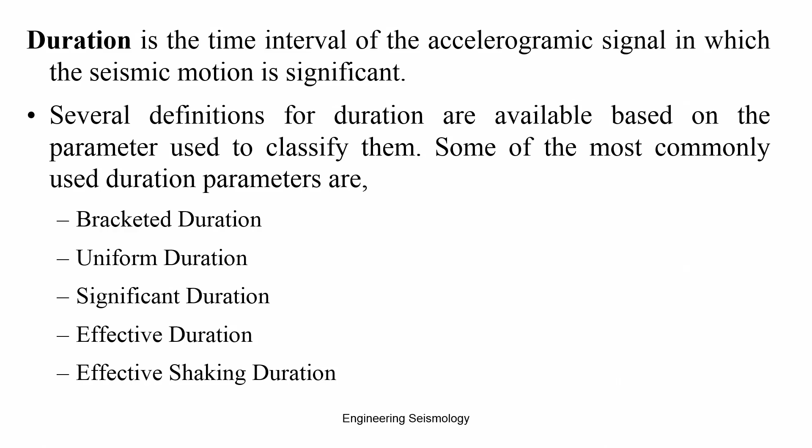So, what is meant by the bracketed duration? Bracketed duration is the total time elapsed between the first and last exceedance of a specific level of acceleration. Generally the threshold acceleration value is taken as 0.05 g. If you plot the acceleration time history of the particular ground motion, even if you record velocity and convert it to acceleration by differentiation, you have to identify the first exceedance of 0.05 g, which may be positive or negative.

So, you can draw lines at 0.05 and minus 0.05 like this. Then you can see which is the first signal crossing. That point you can consider as the starting point of the bracketed duration. Then you can see where it ends, basically at this place. This will be considered the end point of the bracketed duration. So, the bracketed duration is basically this minus this. That is called the bracketed duration.

The bracketed duration is the interval between the 2 points in time where the acceleration amplitude first and last exceeds the prescribed level. It was suggested by Bolt in 1969. Later Ambraseys and Sarma said that instead of 0.05 one should go for 0.03. That means you can define the bracketed duration for 0.05 as well as 0.03, and depending on that your duration changes. This is called the bracketed duration.

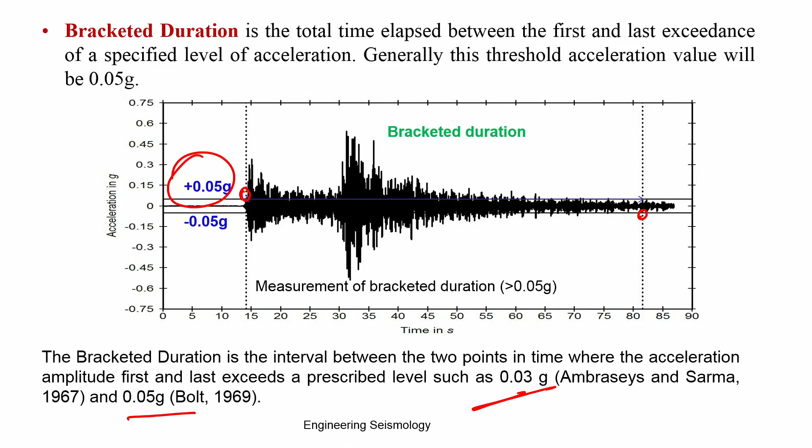So, the next one is the uniform duration. The sum of the time intervals during which the acceleration is greater than the threshold level is called the uniform duration. The threshold value is left to the user; you can define whatever threshold value. Basically, you plot the absolute values of the acceleration time history and only consider the intervals for which the ground acceleration is above the threshold value.

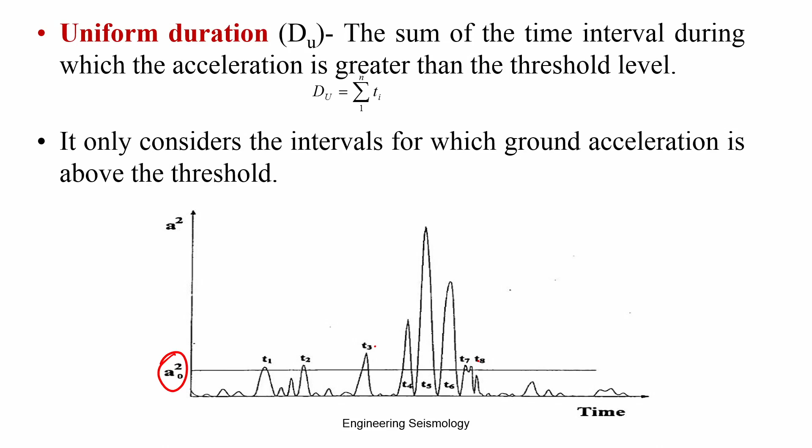For example, you define this as the threshold value, then the times T1, T2, T3, T4, T5 wherever it exceeds. The summation of these is the uniform duration of the ground motion. So, this is the summation of the time intervals exceeding the threshold value, and this threshold value you can define as per your choice.

So, before going to other durations, we will try to understand the Arias intensity. The Arias intensity IA is a measure of the strength of the ground motion. It determines the intensity of shaking by measuring the acceleration of transient seismic waves. Even though the term intensity comes, it was invented by the scientist Arias and is not similar to the modified Mercalli intensity or other intensity scales you use. It shows the strength of the ground motion and is determined from the recorded acceleration data.

So, it is a measure of the strength of ground motion. The larger the Arias intensity, the stronger the earthquake. It has been found to be a fairly reliable parameter to describe earthquake shaking necessary to trigger landslides. It was proposed by the Chilean engineer Arturo Arias in 1970. It is defined as the time integral of the square of the ground acceleration. Arias intensity could alternatively be defined as the sum of all the squared acceleration values from the seismic strong motion record.

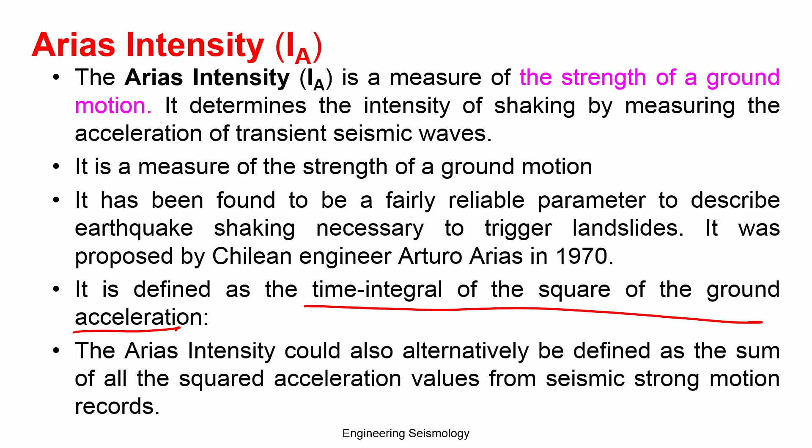So, you can see that the Arias intensity is equal to basically the time integral of the square of the ground acceleration given by this one. So, this is the Arias intensity, the square integral from 0 to Td. A(t) is acceleration in meter per second square, t is time in seconds, g is the acceleration due to gravity, Td is the duration of the signal above the threshold value.

So, you can define a threshold value. For example, generally for structural requirements they take 0.01 g as a threshold value. Theoretically the integral should be infinite. So, the Husid plot is the time history of the normalized Arias intensity. The Arias intensity expressed as a percentage of the total Arias intensity and represented as a normalized variable is called a Husid plot.

So, the Husid plot is basically: you estimate Arias intensity, you normalize with the maximum value, then you get another plot. That plot is called a Husid plot. This is the typical Husid plot of the earthquake, where you can see where it starts and ends, you have the different percentages. So, this data is further used for estimating the duration. That duration is called the significant duration.

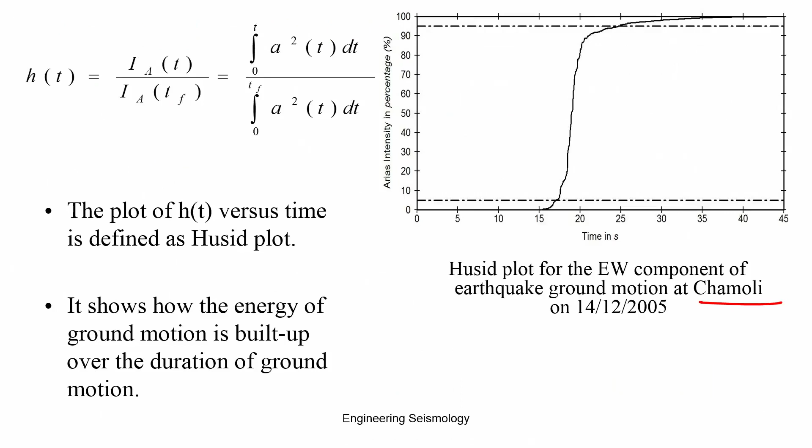So, if you take the Husid plot, you can see what is the 5%, 10%, 20% like this. You draw a horizontal line on 5%, a horizontal line on 95%, then you can define a significant duration for that particular period. So, the significant duration for 5 to 95% is that value. Similarly, if you want to define 5 to 75%, then you can draw a line. So, this duration is called the significant duration 5 to 75% Arias intensity Husid plot.

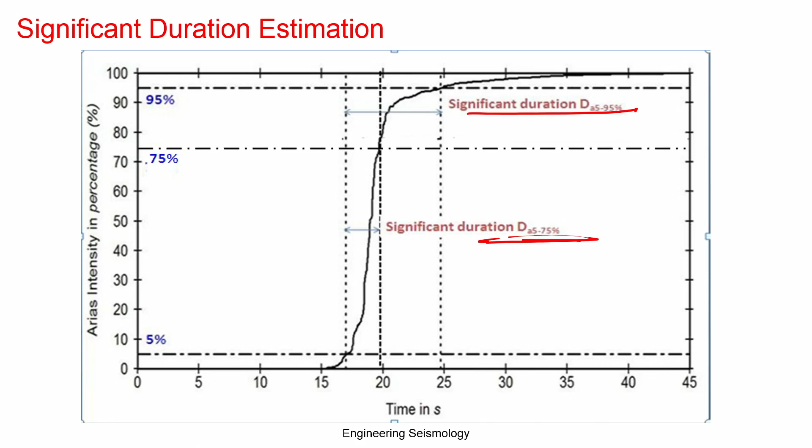So, the next one is called the effective duration. The effective duration is a function of the time interval between T0 and Tf, which mark the beginning and end of the strong shaking phase defined by absolute criteria. So, you define your absolute criteria in the form of Arias intensity, then the time between T0 and Tf, that period is called the effective duration.

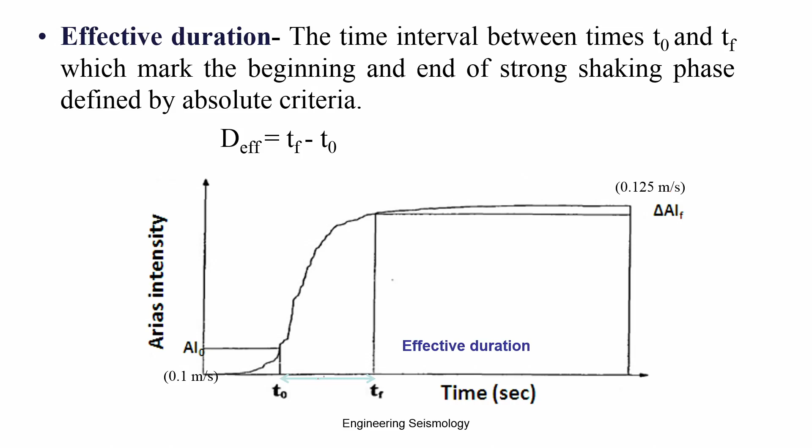So, generally for the Arias intensity they take 0.1 meter per second. Okay. Then this is the value where it is 0.125 meter per second. So, you can see this period is the effective duration. The effective shaking duration is the time interval between the first and last amplitude, considering the value of 0.01 g.

Then the accumulated energy of the three components defines the effective shaking duration, ESD, for the time window which has 5 to 95% of the total energy within the amplitude threshold. This definition considers the major energy part above amplitude 0.01 g. So, this effective shaking duration has been recently defined based on the Japan earthquake data, where they saw that significant and effective duration give different values, and again you are getting another value called the effective duration.

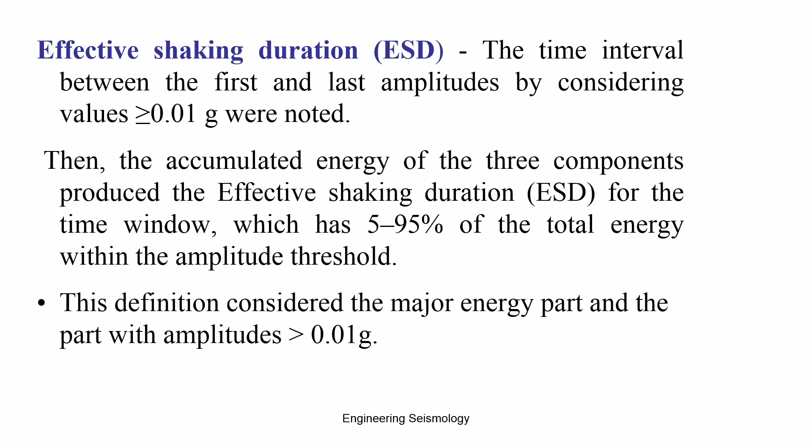So, then they come up with the definition of this effective shaking duration, which is more than the 5 to 95% significant duration, but it is less than the total duration. So, the damage is caused more in this portion. So, this effective shaking duration needs to be considered in the design. That is the new definition given for duration estimation.

So, we have discussed the 5 types of duration. This duration is basically important to describe, first, how much time it takes the structure to fail. Second, how much energy the signal carries. Third, how the seismic wave generated at a source reaches your site. So, all this information is included in the duration estimation.

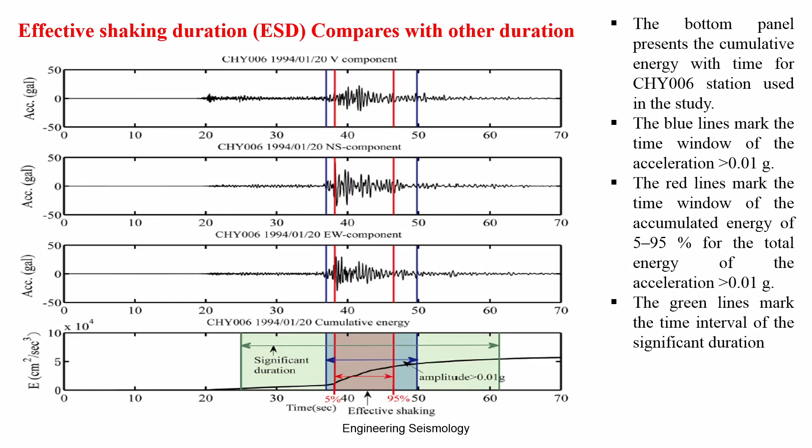Okay. So, this duration can basically be found as a total duration. The total duration is Ts plus Tp. Ts is denoted as the source duration. The second term, Tp, denotes the path duration. The source duration is given as the inverse of the corner frequency. For equal acceleration, greater durations are generally damaging. So, for equal energy, shorter duration presents a greater hazard.

So, these total durations are generally used for simulation of ground motion. If you want to synthetically simulate the earthquake signal for an earthquake which does not have recorded data, you need to know the total duration, source duration, and path duration. There are studies on how the source duration and path duration vary at one place, apart from the durations we discussed so far.

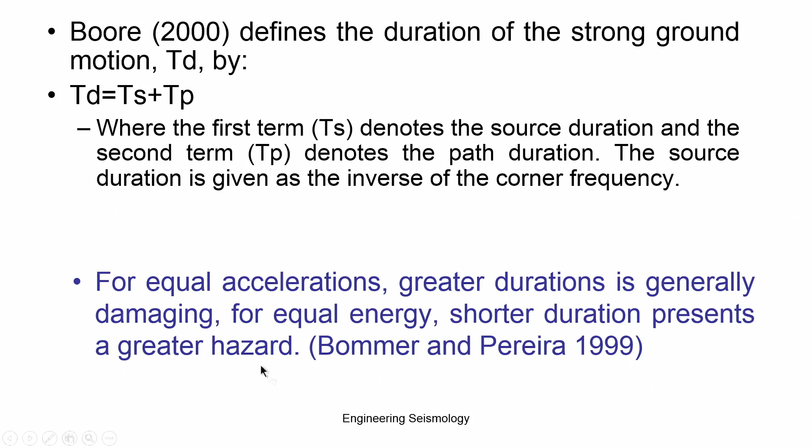So, this duration basically gives an idea of how much energy is carried by the earthquake waves, how it is dissipated, and how strong it is in the structural system. So, a longer duration earthquake causes more damage than a shorter duration earthquake with the same amplitude. Okay. So, these 4 durations are there. As we discussed for intensity, these durations also need to be estimated, and there are duration prediction model equations.

Okay. So, as you know, this duration is controlled by a particular location. For example, this is the ground. An earthquake occurs somewhere. The waves reach like this, then you have several layers. So, it reaches this place, and then it goes to the station where it is recorded. So, I can make this as a horizontal plot so that it is easy to understand.

So, this is the ground. This is the rupture point. Then the waves are generated. These waves travel like this, then you will have different material. Then these waves go through this layer. So, you will have a station here which records the earthquake. This is below the ground level, and it reaches the ground level.

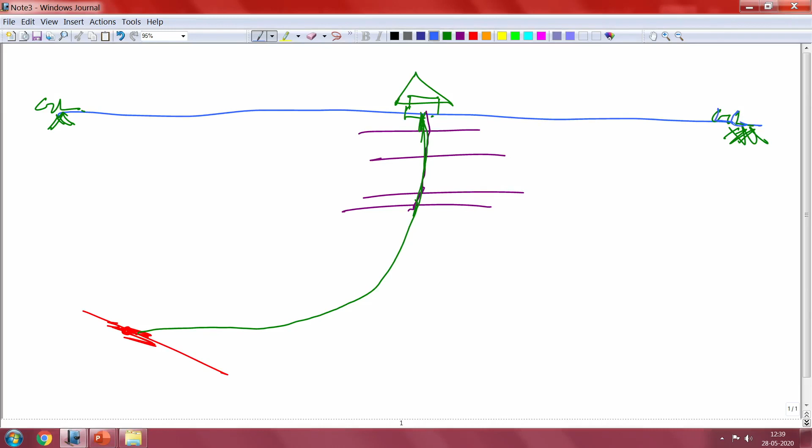So, this is the source, this is the path, this is the site. So, the wave starts from here and goes here, and this data is what you see recorded like this.

Like this, you are seeing this. So, this will be the acceleration or velocity and this will be the time. So, we have noticed that the durations are defined as a function of your acceleration values or the square of acceleration. Acceleration means you can take 0.3 g or 0.05 g where it crosses.

Or you can take the Husid plot, where you will integrate acceleration square and it gives 5% to 95% energy, or sometimes the uniform duration, where 0.1 g or 0.01 g is taken into account. You can see that these waves, when starting from this place, travel like this and reach. So, this is generally roughly about 10 kilometers from the site. The depth is 10 kilometers. So, this depends upon the station.

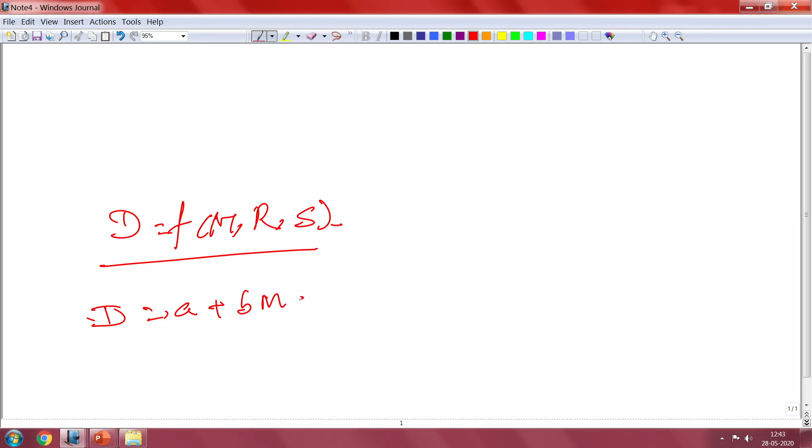and site. So, if you have a large number of data, this will be like an empirical formula, like A plus B M plus C M R, power D, something like that. You can do a multi-regression analysis where the magnitude of the earthquake, R, and site are taken as factors. Such equations will be useful to identify what duration you can expect in the region. Because if you have one record, you will get only one duration estimate. If you have a large number of records in the region, you can know how much these durations vary, and what the standard deviation is.

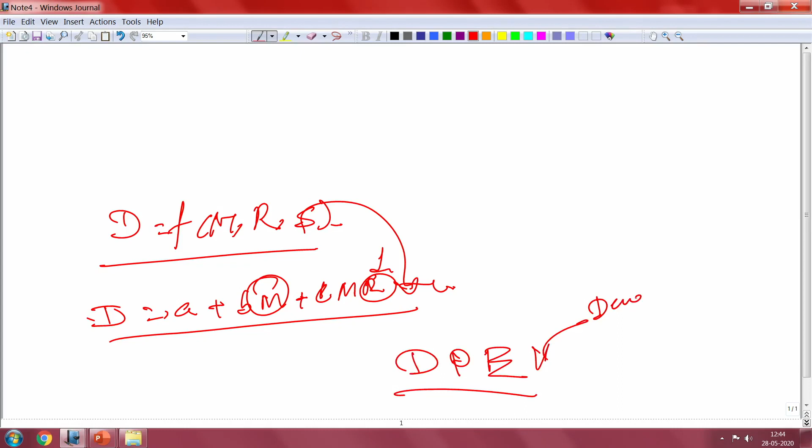This kind of functional form, which is called a duration predictive equation, will be used to estimate the duration you can expect for a given magnitude and distance at a particular location, for the rock site as well as the soil site. So, these are all very important parameters for design. It is not only ground motion parameters like acceleration; there is an equation to predict peak ground acceleration, and similarly there is an equation to predict duration, significant, effective or uniform, however it may be described.

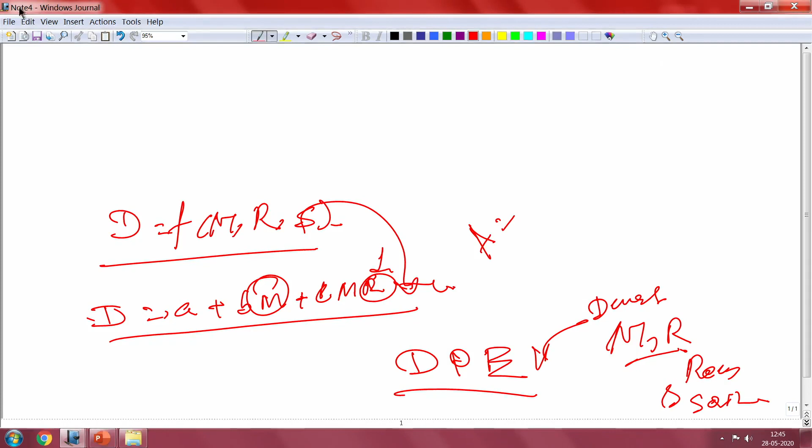So, this kind of development happened in the last 15-20 years, where people thought that it is not only a matter of amplitude; the duration of the earthquake also has to be considered, particularly when you want to assess landslide, liquefaction and even damage potential. In India, not much study has been done on duration predictive equations. So, we have started some work where we collected several data, tried to estimate the duration of different earthquakes, and tried to develop a duration predictive equation.

So, we have a duration predictive equation for peninsular India, because we collected data from many stable continent regions and then tried to estimate effective duration and significant duration and arrive at a duration prediction model for the intraplate region, which considers Northeast America, Australia and some earthquakes in southern India. That is the first and unique work on a duration prediction equation for the intraplate region, which is published in the Journal of Seismology.

As I said, I also do research in these areas, whatever I teach. If you want to refer to that paper, you can. Similarly, a similar kind of equation is needed for the Himalayan region; right now we have done the analysis, but we are yet to publish.

We also found that in the same earthquake, wherever you have a longer duration, you have a higher intensity of damage. If the durations are more, the energy transferred to the structure is much stronger, which will result in more damage than a normal or short duration earthquake. So this duration has to be estimated by considering the data recorded in the region. Then you can use many duration records to develop a duration prediction model.

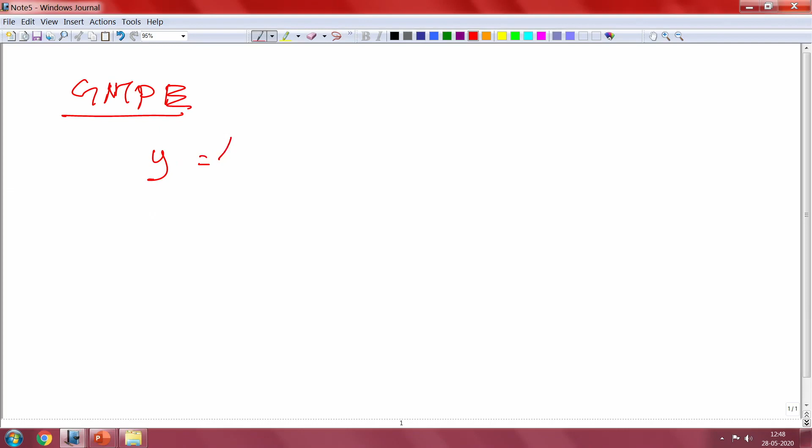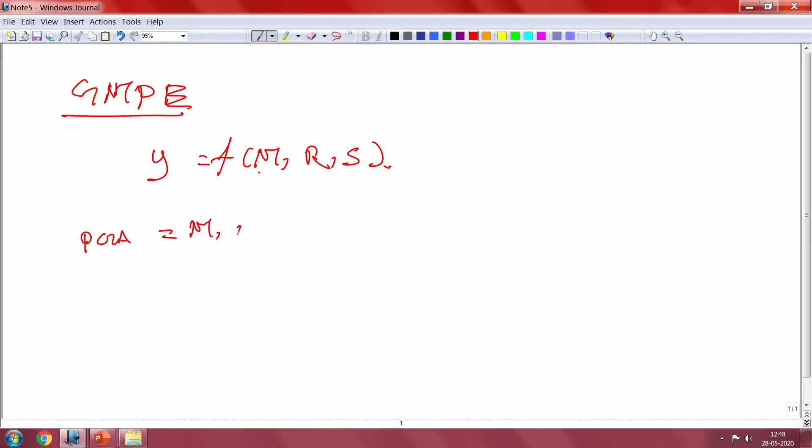So in this GMPE, you can term y, which will be a function of m, r and site s. m is magnitude, r is distance. As we said, we get a PGA from a particular earthquake record, which is known for the given m and r. Similarly you get several PGA, then you plot PGA versus distance for the given magnitude, and then you can do a multiple regression analysis as a function of m, r and site condition. That equation is called a GMPE, or ground motion predictive equation.

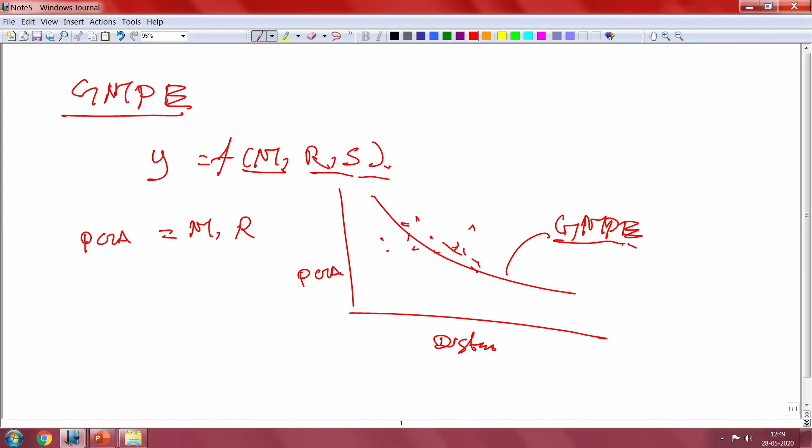So from the parameters we have seen, you can estimate the time domain parameters as peak values: peak velocity, peak acceleration, peak displacement, and then duration values, which are a function of how many cycles repeat in the record, as well as the energy of the earthquake. Using these you can get predictive models. These predictive models help you arrive at the expected value for an unknown magnitude and distance.

Right now we have interpreted the direct record of the earthquake. We have not done any processing or conversion of the data. We simply took the acceleration time history record, then interpreted the peak value and how many times it repeats. Those details we used to interpret the time domain parameters.

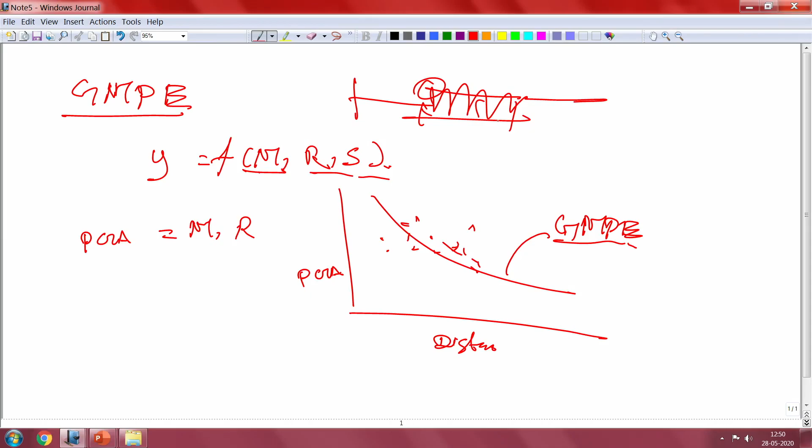The next parameters are the frequency domain parameters. Frequency domain parameters means whatever time history data we obtained from the seismometer or accelerometer should be converted into another form, transformed to the frequency domain. From that you will estimate some parameters, which are called frequency domain parameters.

These frequency domain parameters are important because the source and the path are all functions of the frequency of the wave. We have seen the low frequency, intermediate frequency and high frequency components of the wave, and which station will record which component. These are all related to the seismic moment at the source. Understanding frequency domain parameters will help you get ground motion simulation models or synthetic ground motions. Simulation of ground motions at a particular location is possible using this kind of data, which we are going to discuss in the next class.